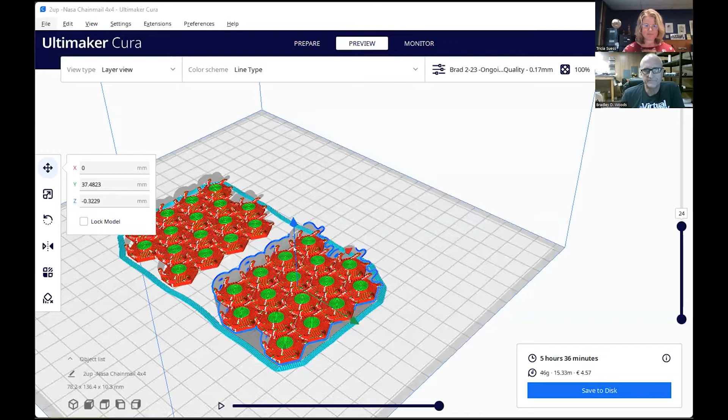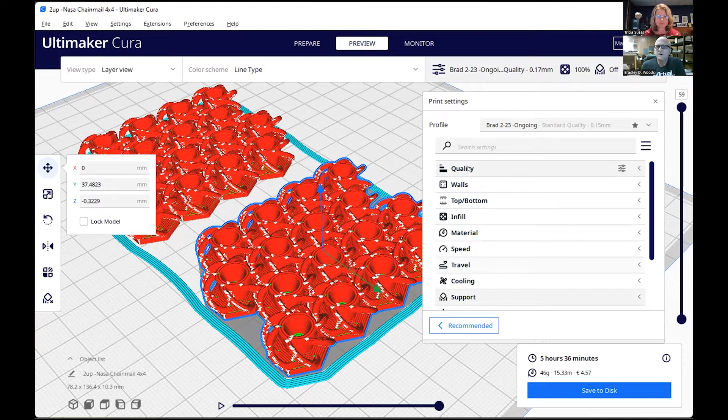Okay, so what we're looking at is a piece of the NASA chainmail. We use this as a sample and we talk about it quite a bit. So there's the preview of the G code. Let me go through the modifications that we made, and they're relatively minor. People think that our filament is going to be very, very different from PLA, and it's not. So what we tell people to do is go into Cura or your slicer and just select a generic profile for PLA. Starting there, set up your basic settings.

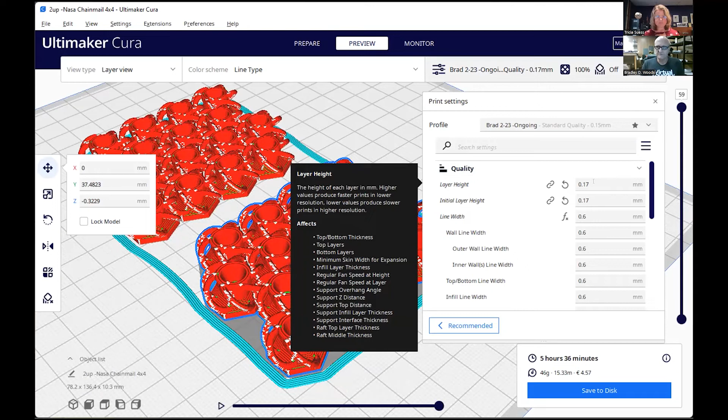Layer height, common question. 0.15 is a good medium. Going past 0.2 can be challenging. It's easy to get under extrusion. You can do this, but we recommend that people just start at 0.15 and get comfortable at that. 0.6 millimeter nozzle is our recommendation for most of our materials. Let's see, what else do we have here? And then the rest of it, no change, same as PLA.

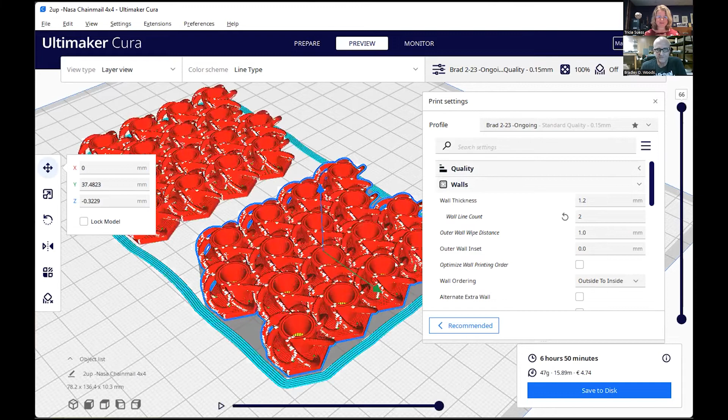Second up, and some of these are stylistic or just personal preference. I like to print with lots of walls, but you really wouldn't need to. It'll print fine if you just go back to the normal line count. And I am going to slice this a few different times because I'd like to show you exactly what this looks like. Great. Okay, so here's one of the elements on the corner, one of the links of this chainmail.

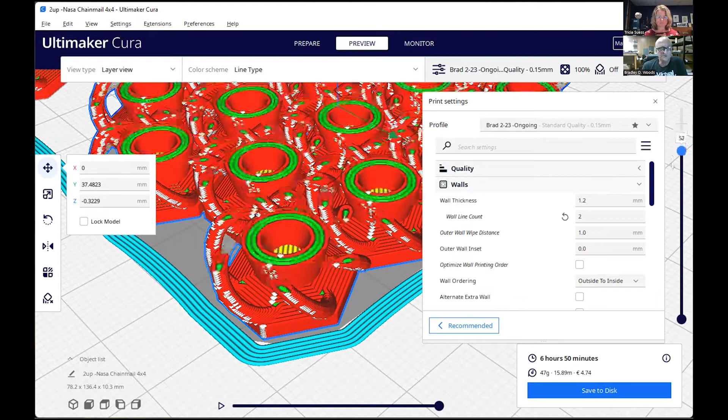And as we bring it down, people's opinions vary on this topic, but I never ever 3D print something without going in here and just looking at it. Make sure that all of the moves make sense. Make sure there's nothing simple or dumb that you overlooked, anything like that. Just give it a sanity check no matter what. I just never hit print without doing this.

Wall thickness, it's easiest if it's a multiple of the nozzle width. We're at 0.6, so 1.2 comes out nice and even, and this is the default. So there's really no other changes here. It's the standard PLA settings. Top and bottom, same, no modifications.

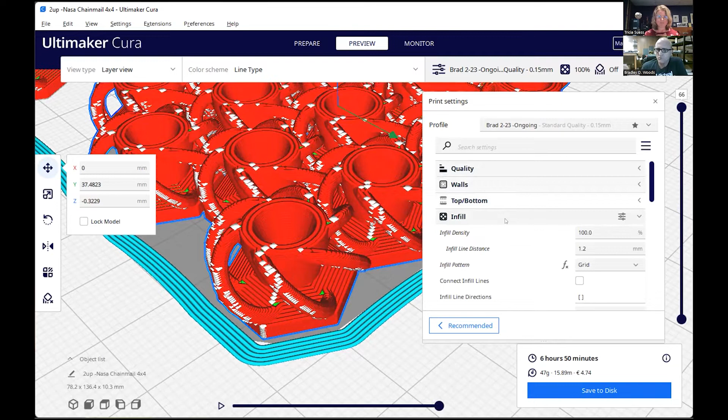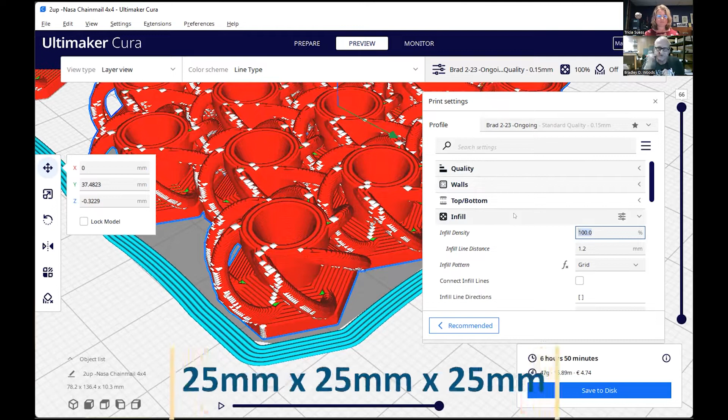Infill. Okay, this can vary somewhat by the shape of the part that you're working on. Thick walls need to be debound more slowly. So one thing that you can do is not print at 100% infill. Like if you had a 1 by 1 by 1 inch cube that you were using for calibration or something like that, that's a particularly challenging shape if it's solid, because the binders need to escape as a gas.

So as your parts get thicker, slow down the debind process and give the gas time to escape. If you don't, you wind up with extra porosity. You'll have an effect that we call pillowing, which is essentially delamination between either the layers or the lines. But go slow and it's not an issue.

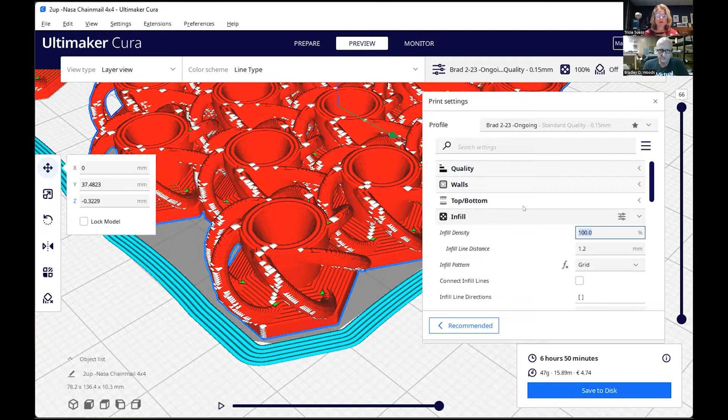Brad, sorry, what do you consider thick in this context? We say anything greater than 5 millimeters. Under 5 millimeters tends to not be a problem. As it gets thicker, it can become more of a challenge. But the challenge is very easy to overcome, just with patience, just debind more slowly. And so a trick you can do is to not fill it 100%, fill it at 90%. That'll leave some gaps in the infill and room for the gases to escape.

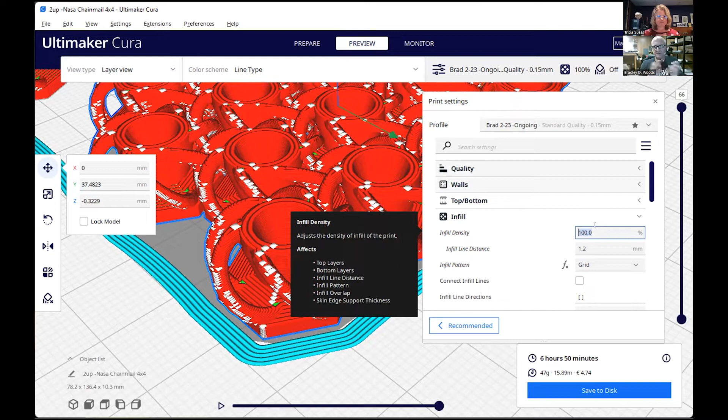The material settings. So these vary from 210 to 245. And part of the reason they vary is that everybody's printer is running higher or lower than they realized. It's rare for these to be perfectly calibrated. In fact, this machine is probably running about 10 degrees cooler than it actually is here.

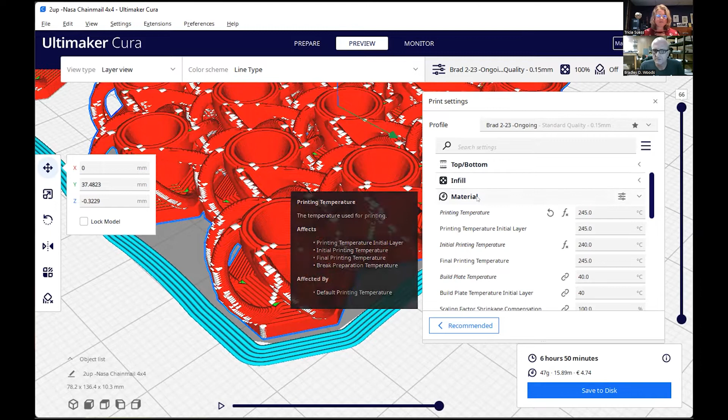But experiment, this is bronze at 245. Our stainless materials, you want to be back more around 210. But copper and bronze, we're running really nicely at 245. So we're typically guiding people to start with 210 for their nozzle temperature and then adjust from there as you look at how the print's coming out.

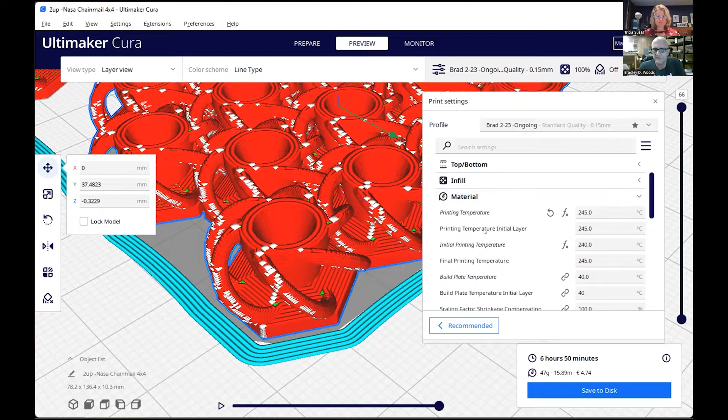Right. And there is no one answer, but it's because of the variability in everybody's systems. These printers are massively different. And the situations they run in are different, the environment, the ambient temperature, things like that. So pick something and build on it. So build plate temperature, 40 is fine. You can run without it. The rest of these are not significant. So again, that's all just the PLA defaults.

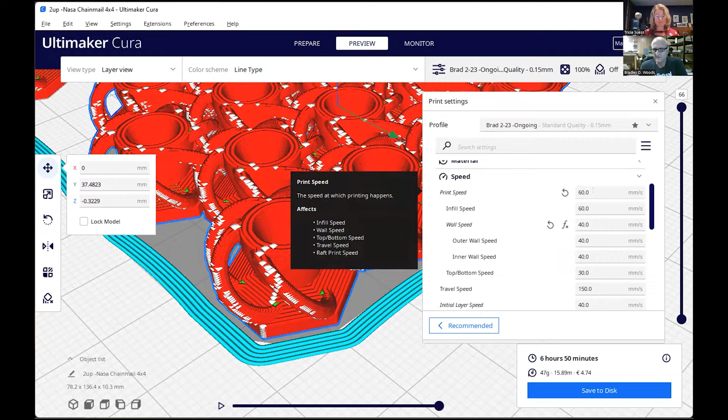Speed, this is a common question. I like to run these at 60. 60 millimeters per second is a nice even number. Once things get smoothed out and the print is going along nicely, I'll sometimes on the printer move it up to more like 80, but 60 is a comfortable number. And for your initial layers, go 40. Just go nice and slow.

And in 3D printing, it's true that the first layer is the most important when you're starting your print. And I think this may even be more true with our metal infused materials. So go slow, get the first layer, and adjust from there. Over extrusion and under extrusion are pretty common problems, and we'll show some pictures of that.

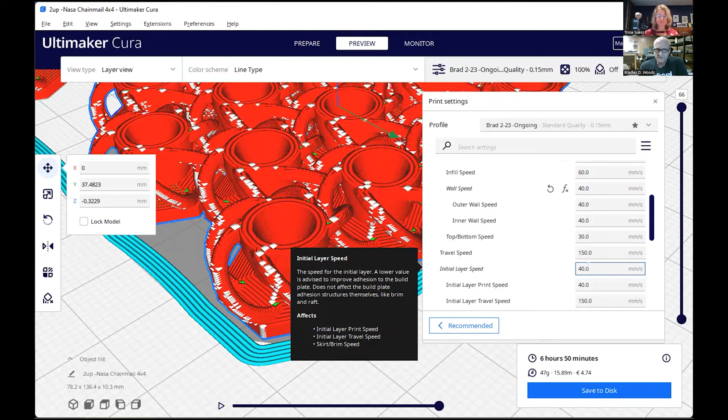But the most common problem that people have with our material, here, I'm gonna stop sharing for a moment, is that on their first layer, they'll have the nozzle too close to the bed. So the bed is literally clogging the nozzle is the effect. So it can look like a filament clog in the nozzle, but it's actually the nozzle being too close to the print bed. Exactly. The bed is actually preventing the material from flowing through the nozzle.

And you can check this quick by, depending on what your printer is, just move the bed down a little bit and make sure material is flowing. But this is by far the most common issue that people run into. PLA has a very low viscosity, so it'll squeeze out and flow. It won't do this. Our materials have so much metal in them that they flow more like a bread dough, is an easier way to picture it. So if you picture trying to shove bread dough through a straw that's in contact with the table, you kind of get an image of what's happening.

What does it look like if the nozzle is too far away from the print bed? What happens is it'll look like a row of rodent droppings, is the analogy that I've come up with. Great. Because they won't attach to the bed, and they'll come out of the nozzle and just sit on the bed. And this can be caused by two different things. One, the layer height could be too high, or your nozzle isn't calibrated to be low enough on the bed, or your flow can be too low. So you'll actually get the same symptom either way.

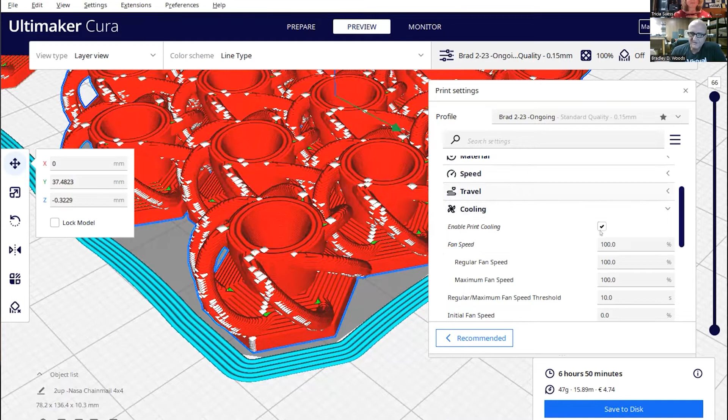So speed, not crucial, slow it down. As you gain experience with it, you can print as fast as you can with plastic. Travel, this is unimportant. Cooling, you can actually shut this off. We typically run without any cooling, and most of our printers don't even have cooling fans on them. And I'll talk about this a little bit.

For example, copper is a really, really good conductor of heat, many, many times better than plastic. So one of the challenges with PLA is removing the heat energy from the print edge as you're going. This is much less of an issue when you're working with the metal composites. They all tend to conduct heat way better than plastic. So cooling the part tends to not be an issue. We don't do much with that.

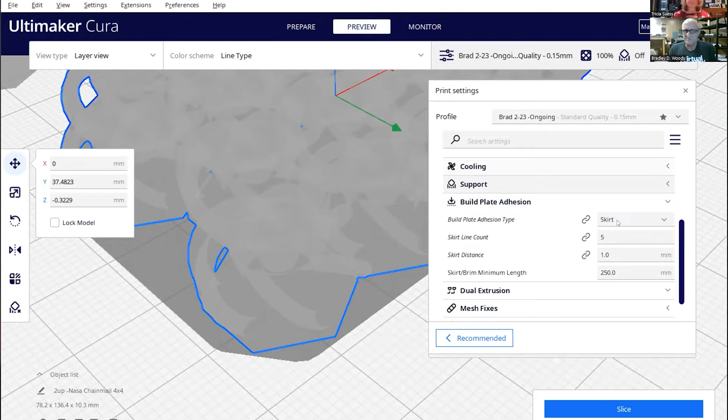Build plate adhesion, again, I print a skirt, which is just a line that goes outside of the print, but not for bed adhesion. I do that just so it prints a few lines, and that gives me a few seconds to make sure that that first layer is tuned in before it starts printing on the part itself. And the rest of it is not important. It just prints like PLA.

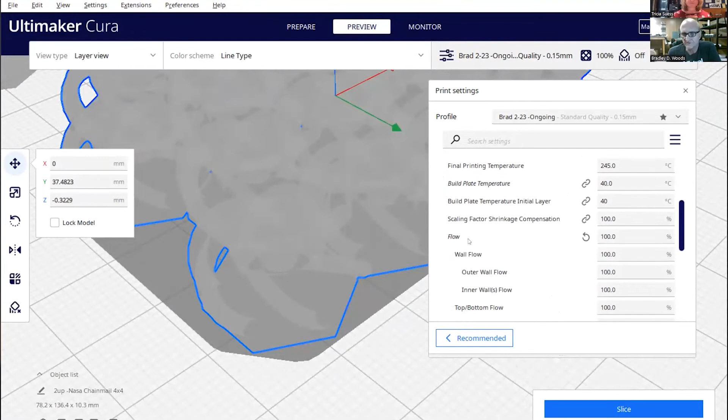Set up for PLA, slow it down a little bit, warm it up a little bit, and you may find it necessary to, in the material, exaggerate the flow rate slightly. The flow rate setting, we often find that you should set it anywhere from 125 to 135. This is another setting that it seems like it shouldn't be arbitrary, but it is. It changes from one printer to the next. It changes from one version of the firmware to the next. It changes from one slicer to the next. So we recommend that people start at 125 to 135% and adjust from there.

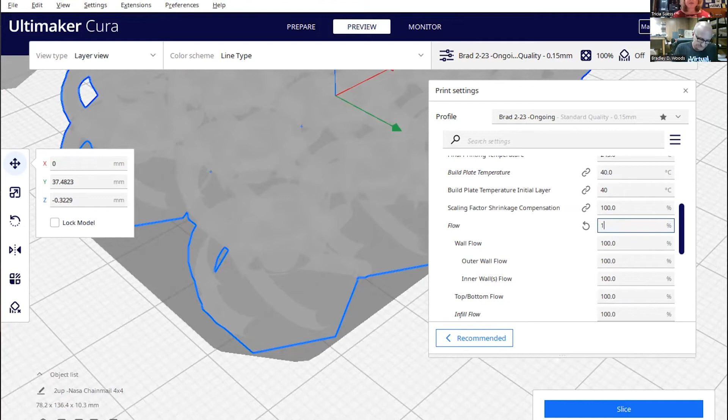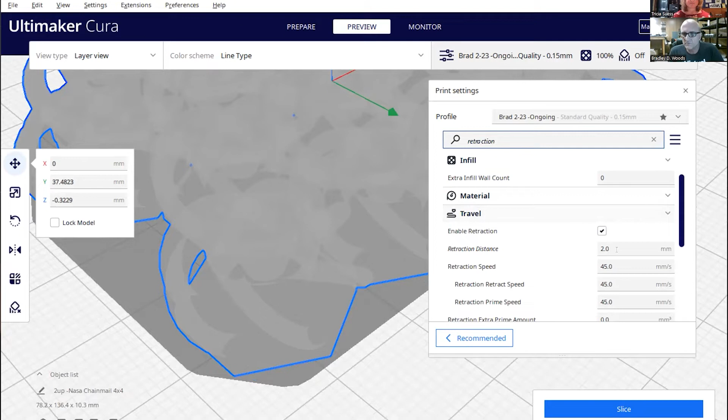And how important is the retraction setting? Yes, retraction is actually very important. What's important is that you don't use it. We typically, if this is turned on, we'll turn it down as low as 0.5 millimeter. But again, with the composite materials, what happens with PLA is it has a high coefficient of expansion. As it warms up, it gets much, much bigger. And that's partly why you have ooze issues with PLA, and you don't with the metal composites. They can't expand. It's copper or it's metal. So very, very low coefficient of expansion.

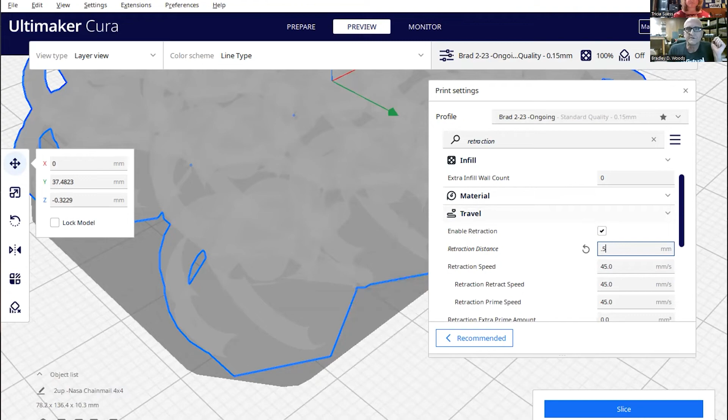So you can either shut this off if you find that you are having issues, or turn it on, but don't go any further than 1 millimeter. We typically set it to 0.5. The reason is, with retraction, the drive gear that's moving the material forward, if you have the retraction on, it'll move the material back and forth between that pinching gear so many times that it'll slowly flatten it out. And then you'll have issues that present as a clog, but they're not actually a clog. It causes a thin spot in the filament where the drive gears are no longer able to move it forward.

Okay, thank you for that detail. We did receive a photo from a partner innovator recently of some bronze filament that was curling in his extruder. Brad, I'm going to work on a photo, but tell us what's happening in that situation. Okay, often several things can cause this. The retraction thing that I just mentioned can contribute to this. The most common is what I described, where the nozzle is in contact with the bed.

Essentially the material is not able to move forward, and our filaments are flexible enough at this point, like the copper and bronze, you can wrap them around your finger. Brittleness is an issue of the past. We've overcome this. So what happens is the material will flex a bit and then slip off the top of the tube that's going into the actual nozzle, and it'll come out, and it's exacerbated by the gear being overly tightened.

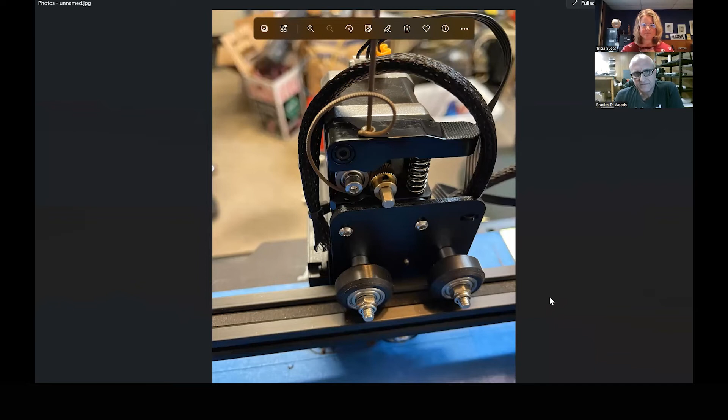Yeah, there it is. And you can see that this is one where it's a passive idler on the left side and then a driven gear on the right. And so as it pushes against the side, this gear is actually making one side of it slightly longer than the other. And that's why you get that curl in it. So you can see the tooth marks in it. It's actually literally elongating one side of the filament and not the other. And it'll curl out of there and come back up and around.

Typically, you don't see this if the material's flowing freely. This could be caused by temperatures being too low. This could be caused by moving the material through the nozzle too quickly. There are a number of causes for this, and they tend to be combinations of issues. But this one you can see pretty clearly that one side of the filament is literally longer than the other, causing it to curl up.

So there are some ways to mitigate this issue, just like you said, with making some adjustments in the settings. Ultimately, these metal filaments will work best with a dual gear system. Yes. And looking at this one, the first thing that I would guess is that the pinion is pinching it too tightly. It's crushing the material. And I don't think that user has the option of loosening that spring. So that's an issue with that piece of hardware.

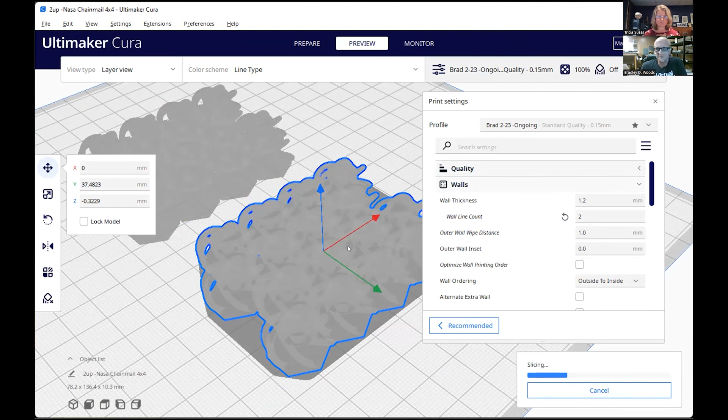I don't have the fastest computer in the world, so maybe we'll scan through this more quickly in post. Okay, I got to rustle up a picture of this. So Brad, I do have, oh wait, back up.